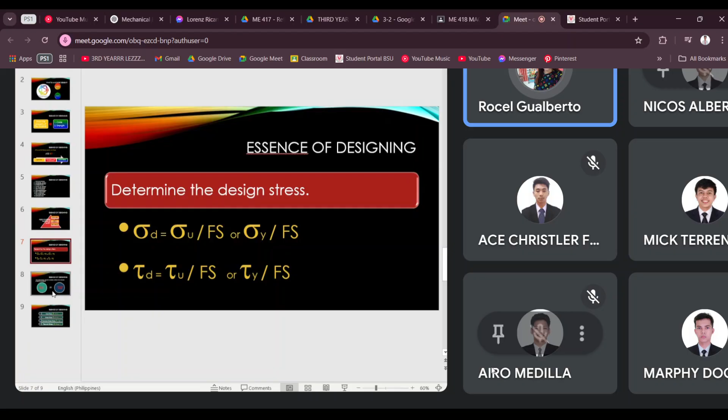Dito, factor of safety. You have there the design stresses and the equation between design stress and the induced stress. Okay na po? Opo. Okay.

So, na-start natin yung, tayo lang, wait. Show ko lang yung isip. Ito po, na-start na po natin ito. Ashley, hindi pa. Okay, so we're done doon lang sa module 1. Okay, sige.

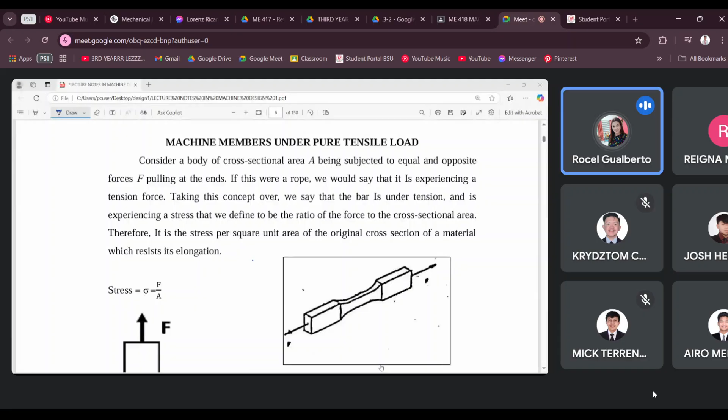Okay, so let us start with members under pure tension. Last time po, we have our essence of design. Okay, so yung mga procedures po doon, okay, yun po yung magiging guide natin in solving for all the problems. Okay, so we always start with knowing the properties of the material as to code and as to strength. Okay, so sa solution po natin, we call that our material specification.

And then followed by the application of a factor of safety taken from your table 1.1. So this factor of safety, it is dependent on the kind of load, the type of material, and then the basis of design. Okay, and then the third one is for you to determine the design stress. So we say the design stress would be the ultimate strength over the factor of safety or the yield strength over the factor of safety.

Okay, so it can be sigma u or sigma y dependent upon the basis of design. And this design stress can be in form of sigma and in form of tau. So pipiliin lang po natin between the two kung alin po yung gagamitin. So paano po natin malalaman kung alin yung gagamitin? It is based on the induced stress.

Okay, so for the fourth one, okay, for a good design, you have to equate the design stress to the induced stress of the material. Okay, so sabi ko nga kanina, the design stress, whether it's sigma or tau, it's dependent on your induced stress.

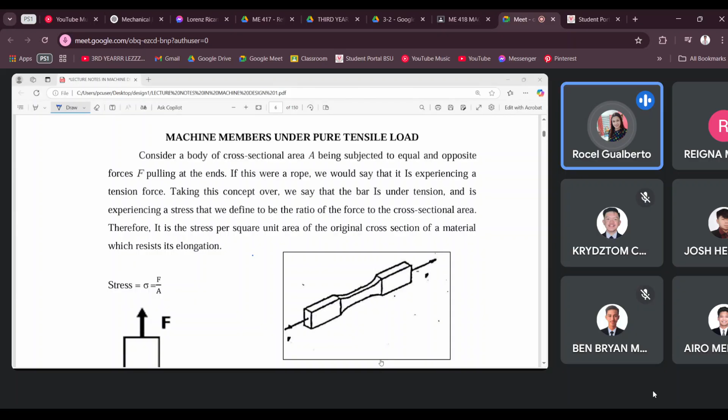So, kung ano po yung form ng ating stress, that would be the same form for your design stress, okay? So, let us have here now yung first topic natin, okay? How do we design the members under pure tensile load, okay? So, a member under tensile load, tulad po nitong nasa illustration natin, okay? So you have here your member and then applied with tensile force F.

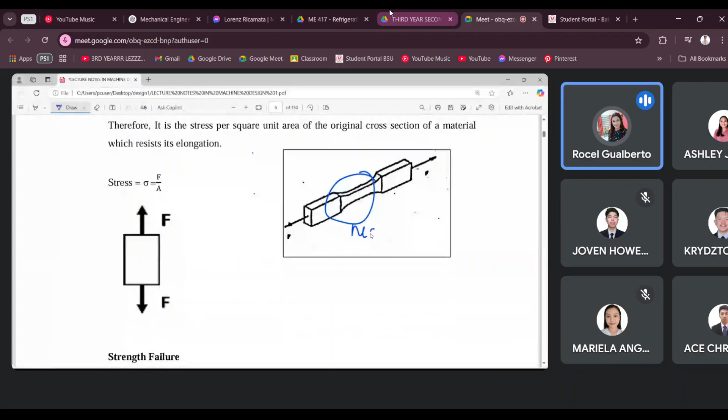So yung force po natin, it tends to pull the material, okay? So what happens now to your material? After a time, mapapansin mo, yung kanyang part na ito, nagkakaroon na ng necking. So we call this po necking. Okay? So necking of force and so as yielding. So when we say yielding po, this is simply elongation. So this is elongation and at the same time necking, that of course when the material is subjected to a tensile load.

Okay? So how do we design a member na ganito po yung force na naka-apply sa kanya? Okay, so we base our design based on the two failures. Okay, so the first one ay base po sa strength failure. Okay, so we say, ang dimension po niya ay base sa induced stress ng material. Okay, so we call the corresponding induced stress simply as the tensile stress.

Okay? And for the equation of the tensile stress, sigma sub T equal to the tensile force over the area. Okay, alin po yung area na yon? It should be the cross-sectional area. So, if, for example, you have there a circular cross-section, okay, then yung area na yun po would be pi d squared divided by 4. So, yung 4 lang, inilagay po natin dun sa numerator. So, you come up with the tensile stress equal to 4F over pi d squared.

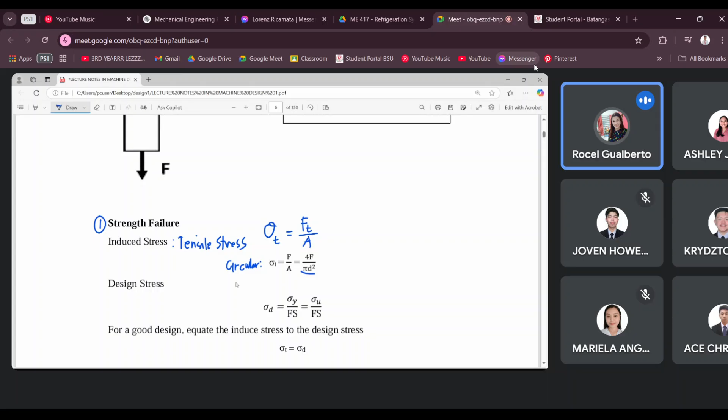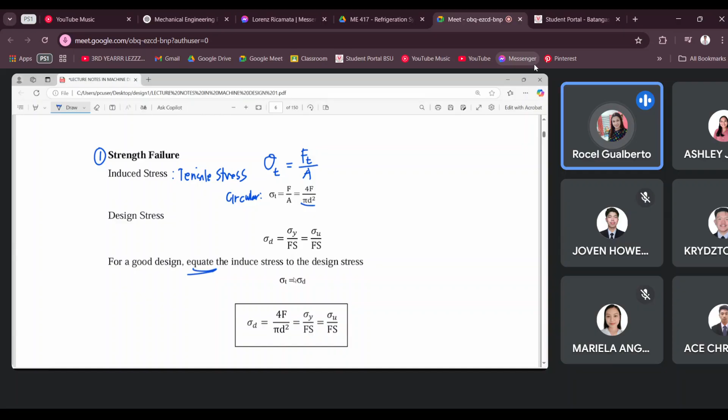And when we say sa design po, okay, we equate, okay, so number 4 po dun sa essence natin, for a good design, you equate the design stress to the induced stress of the material, okay? So, we equate, okay, the induced stress, that is your sigma sub T, to the design stress. You look at the design stress now, okay? The design stress is in form of sigma. Why in form of sigma? It is because the induced stress po ay sigma din, yung tensile stress po natin.

So, we then equate the two, base sa strength failure po natin. For sigma T, that is equal to, kung ito po ay circular, 4F over pi d squared. Okay? At ano naman po yung sigma D? Sigma D can be sigma Y over Fs, o kaya naman po sigma U over Fs. Okay, so yun po yung dalawa.

Kapag basis of design is the yield, ito naman is basis of design is the ultimate. Kaya ano po yung equation natin? So you have your sigma D, kung ilalagay natin, paghiwalayan natin based on ultimate, your sigma D is equal to sigma U over factor of safety.

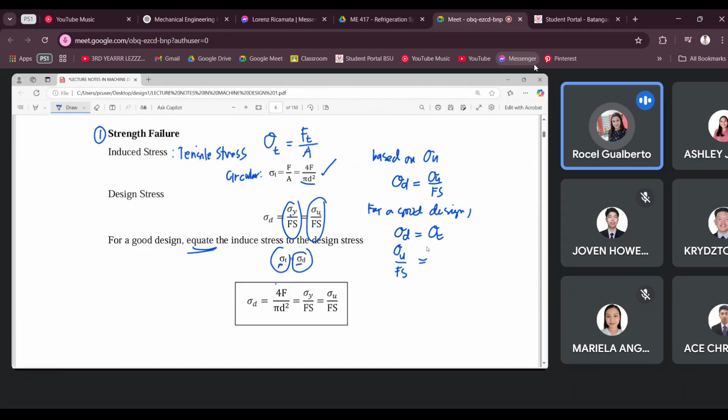For a good design, you equate design stress to the induced stress of the material. So this is sigma U over Fs equal to the tensile stress kung siya ay circular. Ilagay muna natin yung Ft over A. At kung siya ay circular, that is 4F over pi d squared equal to sigma U over Fs. So from this, you can compute now for a diameter or a dimension. Sigma U and Fs, this will be taken from the table.

The force here is usually given, the tensile force. Then you can compute for the diameter. So yan po yung based on the ultimate.

Kung based on yield naman po, then what would be our equation? Your sigma T is equal to sigma D. So this time, sigma D would be sigma Y over Fs equal to 4Ft over pi D squared. So you can have there another diameter.

Yari po naman ay based on your sigma Y. Titingnan mo lang po doon sa problem, ano ba yung requirement ng design. Is the design based on... yun po sinabi, yung basis ng design, ano yung gagamitin natin.

It depends on the material. Kung ang given material sa atin ay ductile, ang gagamitin natin ay based on yield. Kung siya naman ay brittle, ang gagamitin natin is based on ultimate. Yun ay kapag wala lang sinabi. So that is how we decide based on the strength failure.

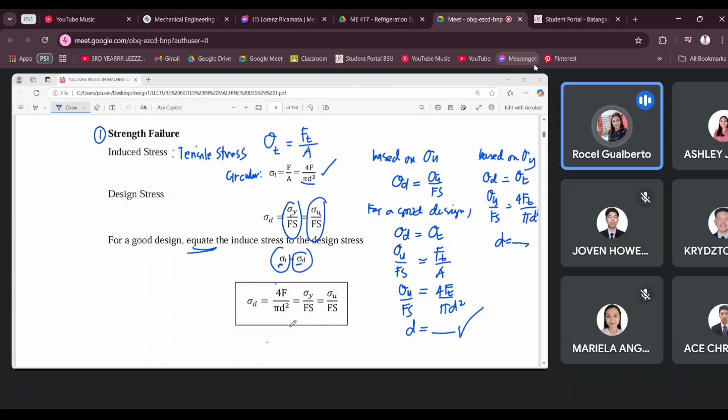Pangalawa naman, ang pangalawa po ay base sa tinatawag natin as the deformation failure. Ano naman po yung deformation failure? When you subject the material to a tensile load, what will happen? Pag hinila natin yan, nagkakaroon ng necking and at the same time, nagkakaroon ng yielding or elongation. So we have there the corresponding deformation.

So the deformation is equal to FL over AE. Yan naman po ay na-derive natin during our deformation lesson. So the deformation is equal to FL over AE. When you say deformation, this is simply the change in length, this is simply delta L. Kung ito po ay tension, so this is your elongation. So the elongation is equal to FL over AE.

If you have again a circular cross-section, yung area natin, papalitan natin. So the deformation now would be equal to the tensile load times length, over area pi d squared over 4, then E. So this is the deformation or the change in length: tensile load, original length of the material, cross-sectional area that bears the diameter or the dimension, and E is the modulus of elasticity. So iyan po yung value.

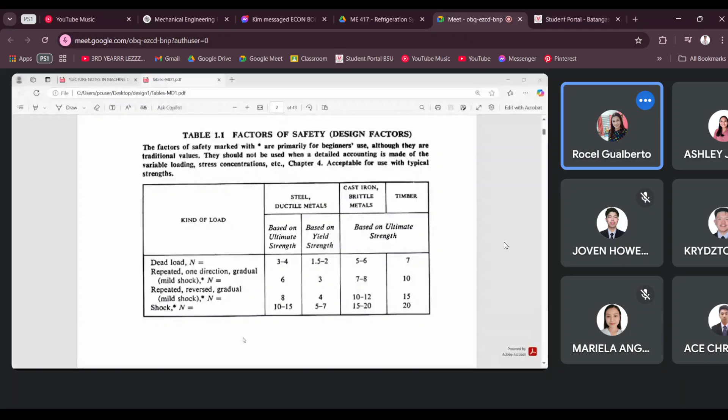AISI C1020 as rolled. And then you find value of E po. Hanapin po natin dito yung E.

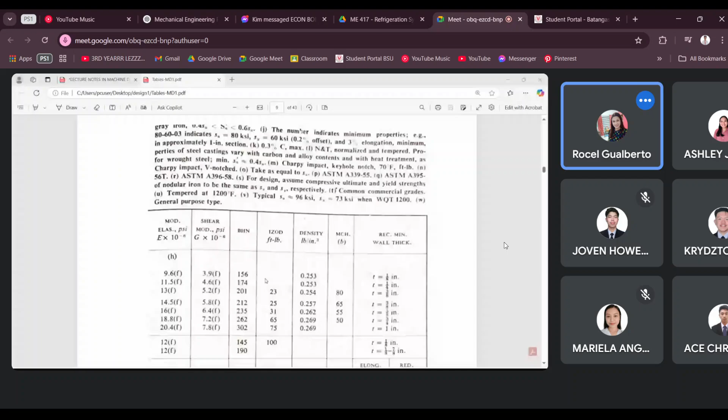So this is table AT 7. Ang hahanapin mo po muna is yung material, say 1020 as rolled. So ito po yung 1020 as rolled. Ang gagawin mo po, titingnan mo within yung row ng 1020 as rolled kung may given value ng E. Pagtingin niyo po dito, wala naman po din yung value ng E. Yung kasunod na page, yan po kadugtong niya, pero wala din po tayo nakitang value ng E.

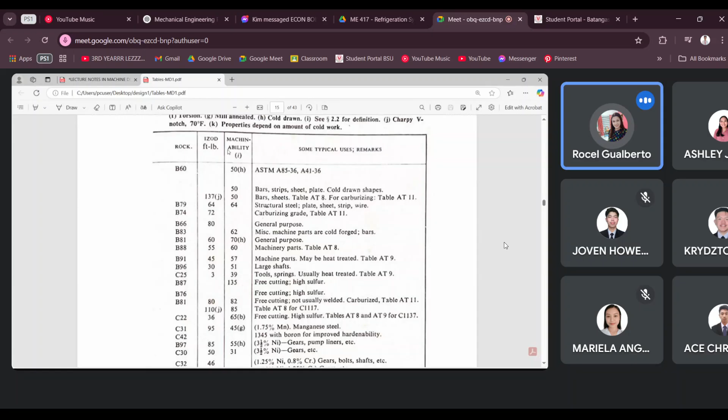So there are cases na wala within the row niya, pero yun po ang una natin titingnan. Dapat doon sa row, tingnan mo kung may value ng E. Pag wala po doon, saan pwedeng tingnan? It would be on the heading ng table, katulad po nito.

Sa heading ng table, makikita mo dyan may nakalagay na modulus of elasticity in tension or compression equal to 30 times 10 to the 6 PSI. Ibig sabihin, yun yung ating gagamitin. At yung E na yan would be valid for all materials listed in this table AT 7. So ganun natin hahanapin yung value ng E, at isasama natin yan doon sa material specification.

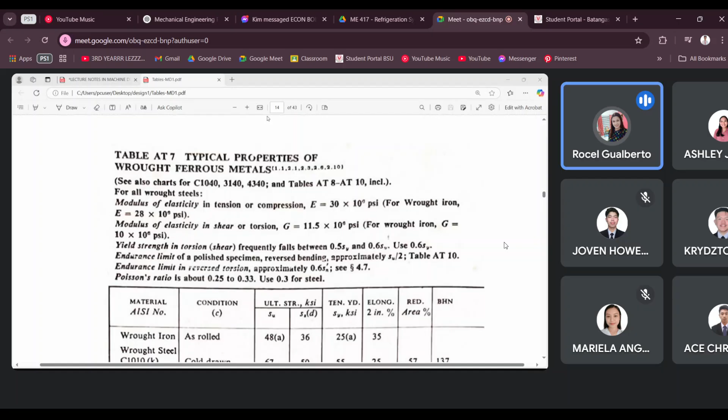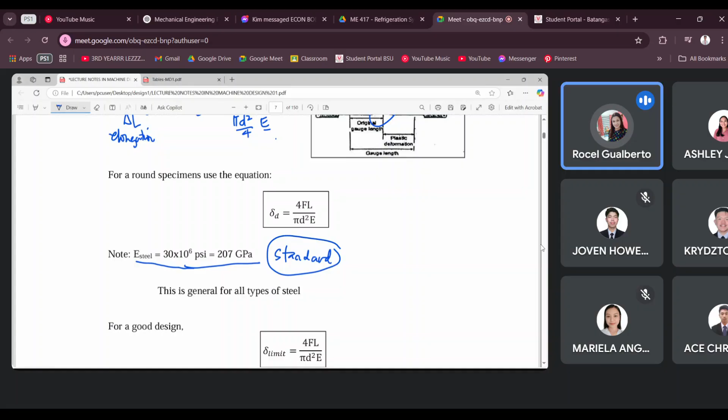Di pag given, doon natin siya isasama along with your sigma U and sigma Y, and then the reference table kung saan siya nakuha. Yun yung ruling sa paghanap ng value ng E. Una, within the row. Pag wala dun sa row, titingnan mo naman doon sa heading ng table. Tapos pag wala pa din, assume to use the standard. This is the standard value for steel, that's 30 times 10 to the 6 PSI or 207 gigapascal. Gagamitin mo itong value. Standard na yan kung wala doon sa table of properties ang value ng E, yun yung isasubstitute natin. But in this case, naka-indicate yun doon sa table AT 7, 30 times 10 to the 6 PSI, which is equal to the standard also.

Now, for the deformation failure, ito naman ang gagawin natin. So we say for a good design, you equate the allowable limit of deformation to the actual deformation, the computed deformation. Yan yung FL over area times E, na kung circular, magiging FL over pi d squared over 4 multiplied by the modulus of elasticity, equal to the allowable limit of deformation.

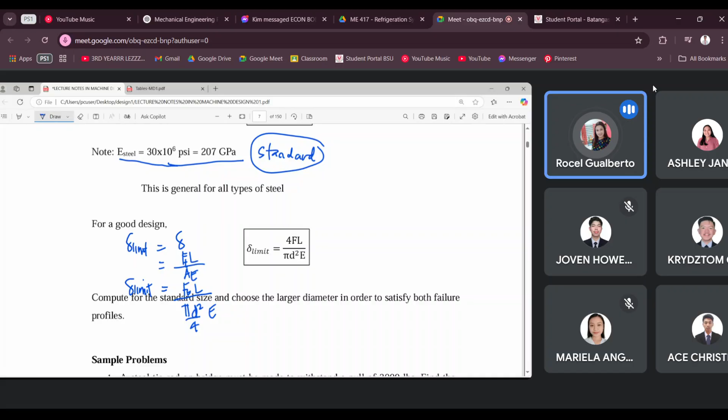Alin yung allowable limit of deformation? Halimbawa, stated dun sa problem, say, the member should not elongate more than 0.1 inch. So yung 0.1 inch, that would be the allowable limit of deformation. Pwede lang siyang magkaroon ng elongation up to this value. Yun yung i-equate natin to the computed deformation, to come up with another diameter or another dimension.

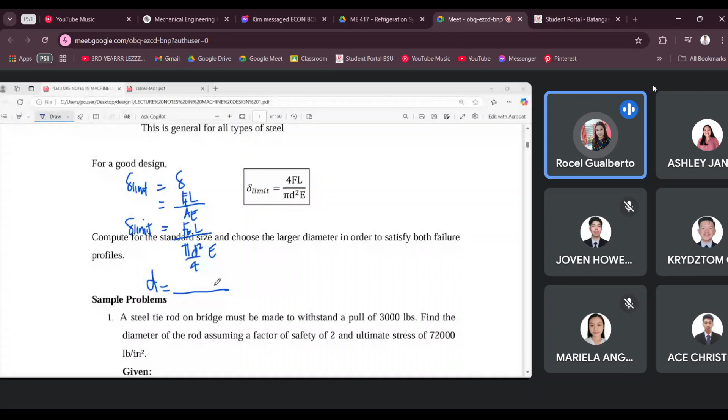So ano pong nandito? Ito ay sagot galing sa deformation failure. Kanina, we have come up with our answer also gamit naman itong strength failure. Ibig sabihin, we have there two answers. So when we design, we do have there two answers, one coming from the strength failure, the other one coming from the deformation failure.

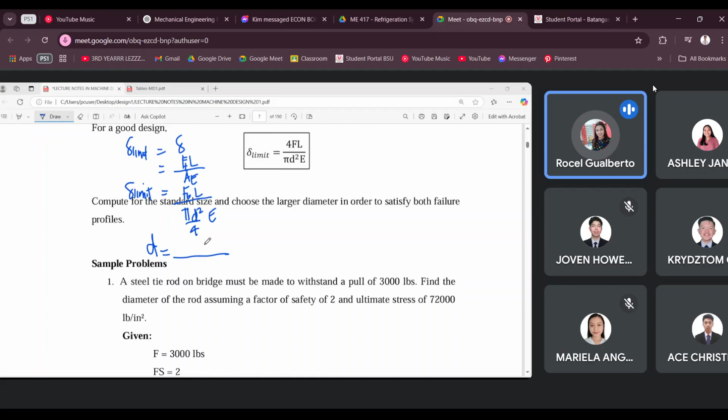Ano po ang gagawin ngayon? Since we have there two answers, alin yung pipiliin? You simply choose the larger diameter. Dapat meron kang conclusion: therefore, use the larger dimension, or bigger dimension, to satisfy both criteria. Alin yung sinasabi kong both criteria? Yung dalawang failure, the strength failure and the deformation failure. So you use the larger diameter, kaya lalagay mo dyan, therefore use kung alin man sa dalawa yung mas malaking value.

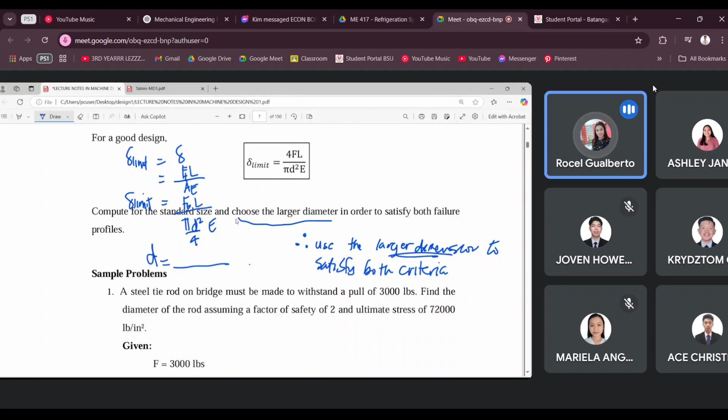Not at all times there would be a deformation failure. Ang deformation failure, meron lang if you are given this. Pero pag wala namang nagbanggit as to the allowable limit of deformation, then the answer would be based only on the strength failure. So isa lang din yung magiging sagot mo, at yun lang yun na din yung magiging conclusion, kasi wala ka naman pagpipili. Yun. So yun yung way on how we solve for a member under pure tension.

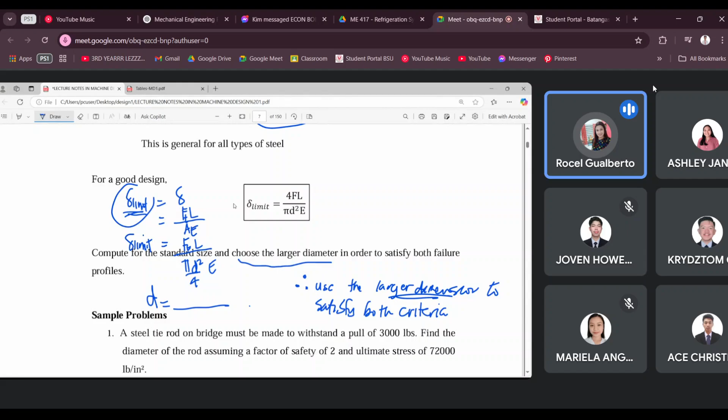Okay, let us take the case of the sample problem. Init po tayo. Yan, so for number 2.

For number 2, this is a link which is subjected to a tensile load of 10,000 pounds. This is made of AISI C1020 steel, normalized. If load is repeated but not reversed, and H is equal to 20... this is H is equal to 2B, sorry. Determine the dimensions of the section with the design based on the ultimate strength. So ito yung ating B, ito yung H. The cross-section of the link is a rectangular cross-section.

So when we solve this, ang gawin ninyo, you try to resolve on your own. Do not simply rely on the solution presented dito sa lecture note, para matutunan ninyo rin kung paano natin siya gagawin. Ang gawin natin, gawin natin ito: instead of the ultimate strength, we make it now the yield strength, para maiba yung ating solution.

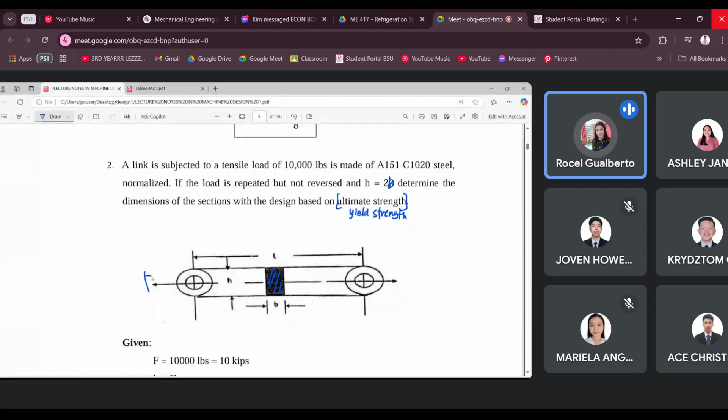Okay, so you look at this one. A link is subjected to this tensile load. This is your FT, which is equivalent to 10,000. This is the link made up of 1020 steel normalized. The load is repeated but not reversed. And then you have the cross section H and B. So you are to determine what is the value of H and what is the value of B, with the design based on yield strength. So whenever you solve, you follow the essence of this.

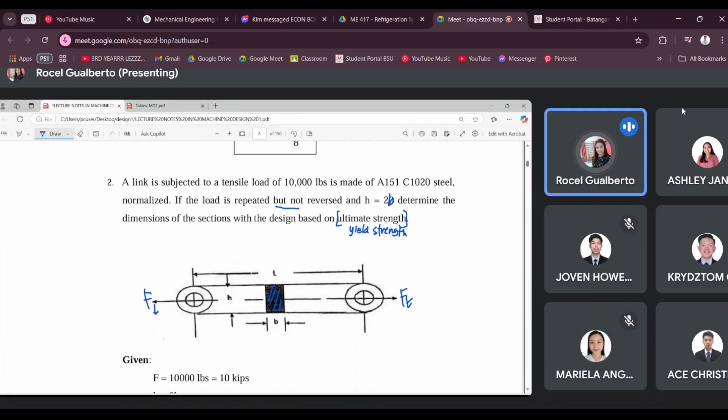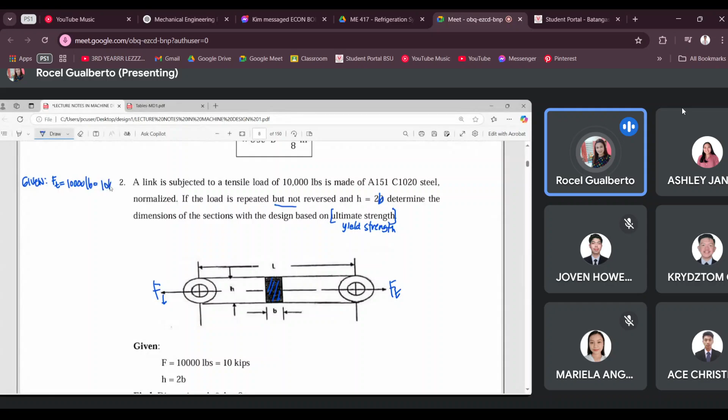Here's the given values. So we start with the given, you identify the given values. First, you have the tensile load, that is 10,000 pounds, equivalent to 10 kips. And then another given is the relationship between the dimensions: height is equal to twice the width, H is equal to 2B. And then after this, you have their material specification.

So for material specs, know the property of the material as to the code and as to the strength. So you put the code of material plus the sigma U and the sigma Y value. Now, you also add the value of E, the modulus of elasticity, if there is one in our problem or table. So we have AISI C1020 normalized, that is our material, that is the code. Then find value of sigma U, find value of sigma Y, and if there is a value of E, indicate it as well. Please find it in the table of properties and what would be the value of your sigma U and sigma Y. Same thing with E. Please put it in the chat box. Go ahead, find it now.

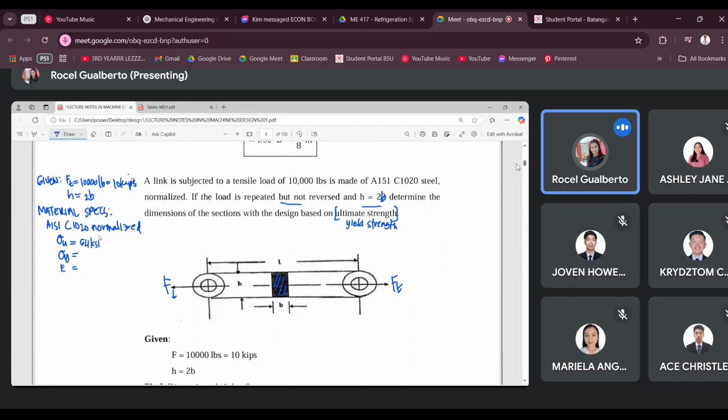You have their table AT 7, page 15. So find our value. Okay, to make it easier, 1020 normalized, there it is. So sigma U is 64, and the value of sigma Y, so this is 64 and the other one is 50. So this is 64 KSI, and then this is 50 KSI. And then for the value of E, it is not within the row, you have to look again at the heading of the table. So 30 times 10 to the 6 PSI. So E is equal to 30 times 10 to the 6. We can have this written as 10 to the third, but then it would be in KSI. So this is taken from table AT 7, page 15.

So after this is to apply a suitable factor of safety. Thank you, Glorious and Christian. So we have here now, after our material specification, we go now with the factor of safety. So we follow the procedure defined in the essence of design. So we have here factor of safety as the next step.

Now, for the factor of safety, it is dependent on several factors, three in fact. The first one: the kind of load. From the problem, it is stated that the kind of load is repeated but not reversed. So this is the kind of load. After that, what's next? The type of material. Given is 1020 steel normalized. So what is the type of material?

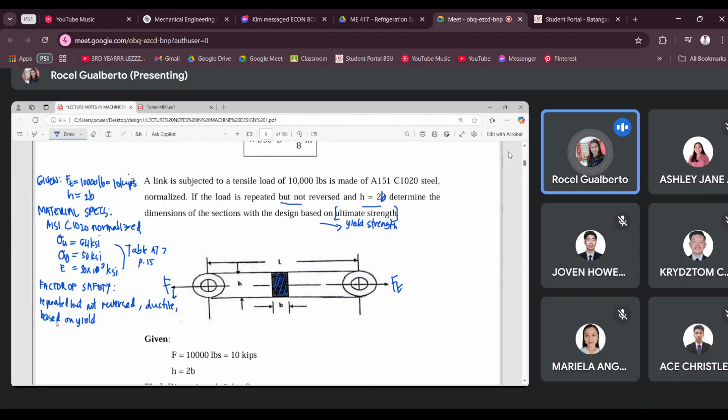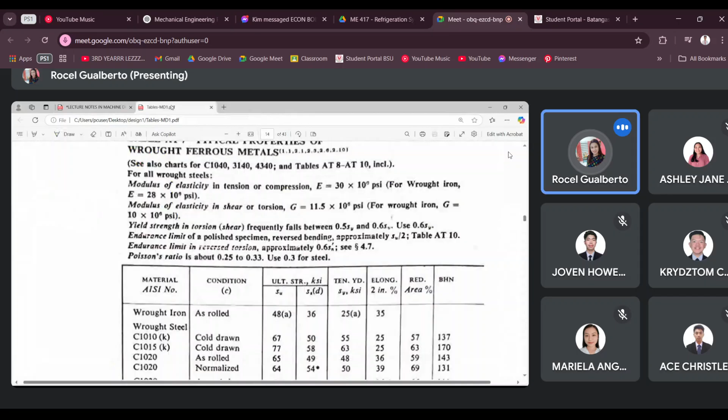So repeated but not reversed, ductile, and then the other factor would be the basis of design. So what is then the basis of design? I corrected this already. So what we do is put that it is based on the yield. So based on the yield. In our example solution here, that would be based on the ultimate. So given these conditions - repeated but not reversed, ductile, and based on yield - we use table 1.1 to determine the factor of safety, that is on page 1.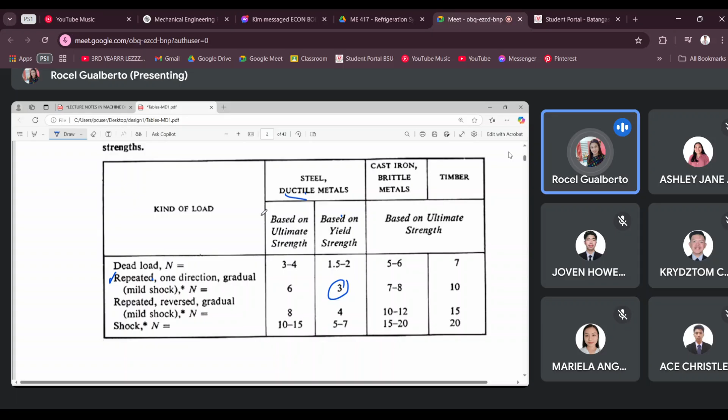So kind of load: repeated but not reverse. That means it is repeated in one direction only. Because if it says repeated but not reversed, so it's repeated in one direction. And then you have a ductile material, and then based on the yield strength, so that's my requirement: based on the yield strength. So repeated in one direction, ductile, and then based on yield, so that would be 3 as our factor of safety. So Fs is equal to 3, taken from table 1.4, page 1. So this is the factor of safety.

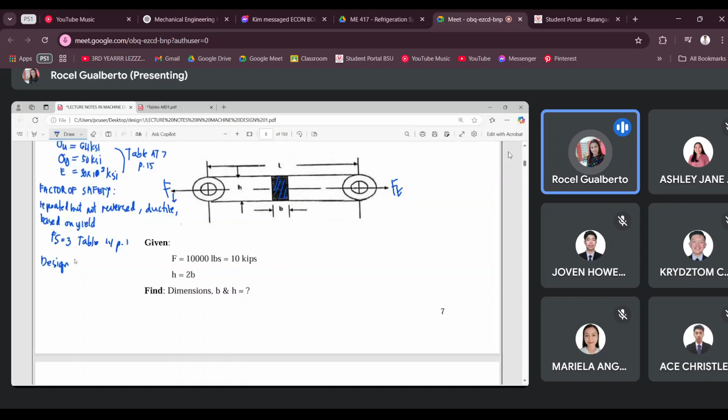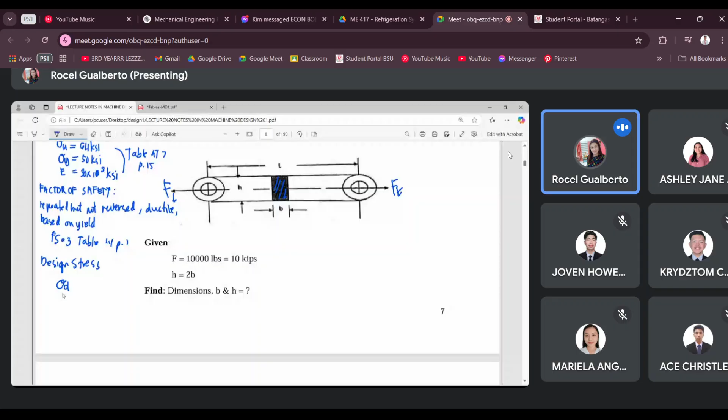After applying a suitable factor of safety, you come up now with your design stress. For the design stress, we use sigma D. Why do we use sigma here? Because the induced stress is tensile stress, also in the form of sigma.

Since what we have now is based on the yield strength, then the design stress should be based on the yield strength. So that would be equal to sigma y over factor of safety. Then you simply substitute: sigma y is 50 KSI, and the factor of safety is equal to 3. Then what would be the value of the design stress?

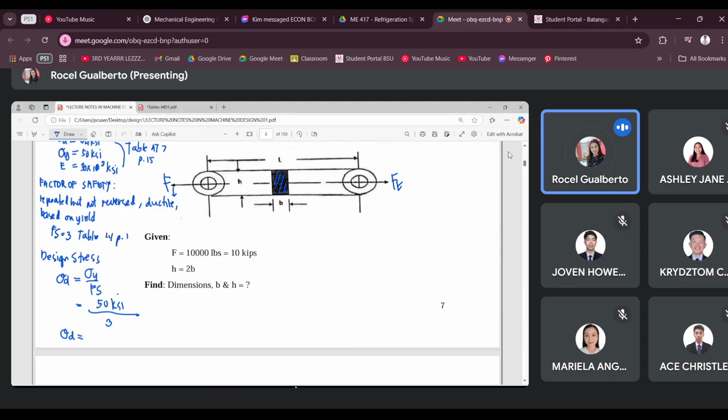What is the value of our design stress? Recompute: that's just 50 divided by 3, so we have 16.667 KSI for the design stress.

So what comes next after the design stress? After the design stress, that's where our two ways of solving for the dimension come in. It's by the strength failure, designing against the strength failure, and the other one is considering your deformation failure.

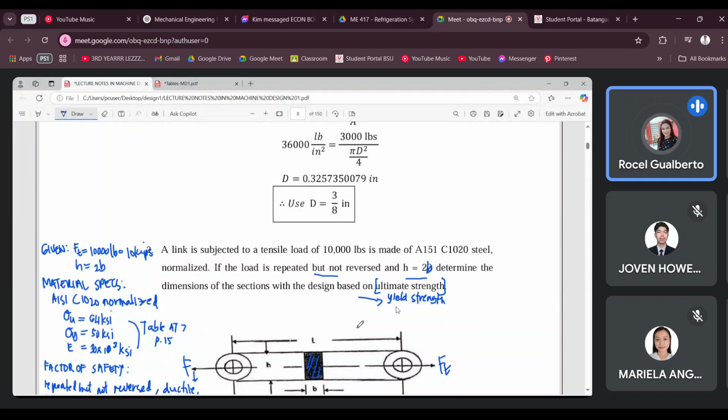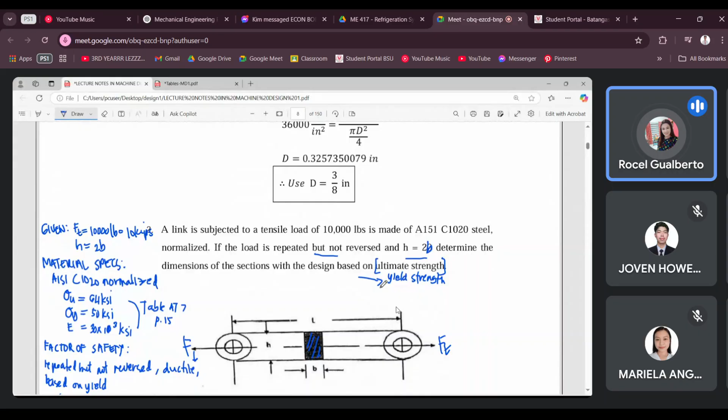But looking at the sample problem, given this problem, we are not given the allowable limit of deformation. So since the allowable limit of deformation was not given, our design will be based only on the strength failure. But if it were given, then there would be two answers.

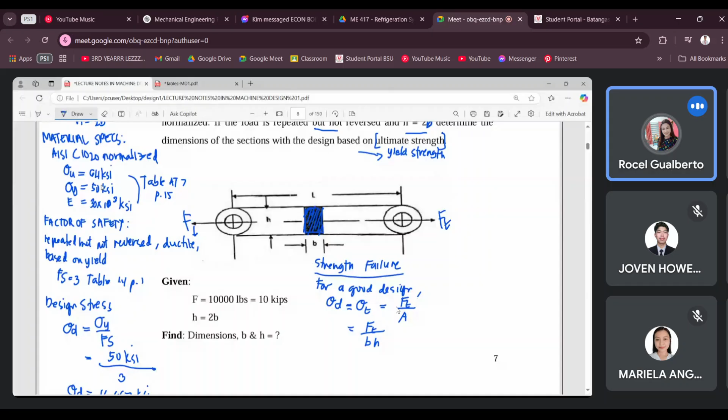But there is a relationship given such that H is equal to 2B. So what we do is express H as 2B. So FT over B times 2B, we get FT over 2B squared.

Substituting the value, FT is equal to 10 kips, over 2B squared. And what is our value of sigma D, the design stress we solved for? That's 16.667 KSI.

Use your calculator to compute for the value of B. So we have 0.548, so that's fine. So B is equal to 0.548 inches. But as I have said, our answer cannot just be that.

We have to express our answer to the commercially available size. What is the commercially available size for that B value? Let me show you. Our answer cannot just be that computed value, we need to convert that to the commercially available size.

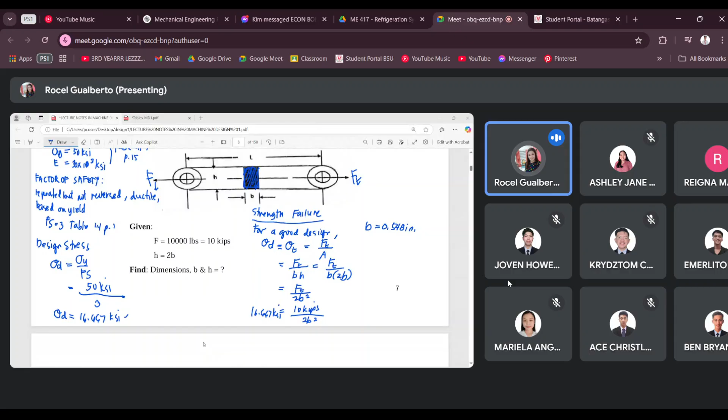This is how we incorporate the economic aspect of our design, by expressing it to the standard size. So these are the preferred sizes, and these are what we use to come up with a standard size.

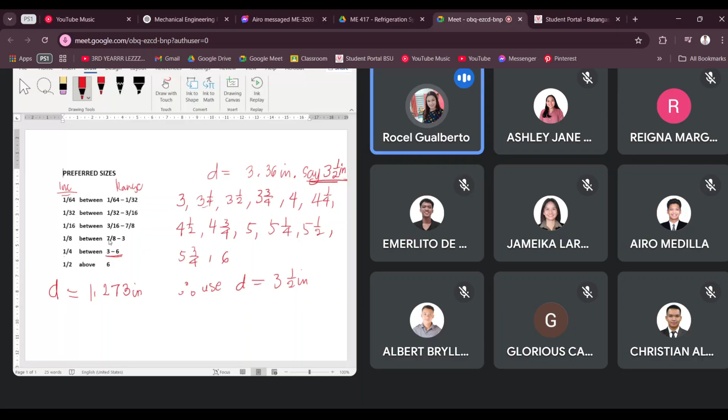Okay, halimbawa po, isa pa po. Say, diameter nakuha natin is 1.273 inches. So saan naman po siya papasok? Okay, so saan po siyang range? Nandito po siya sa 7/8 up to 3.

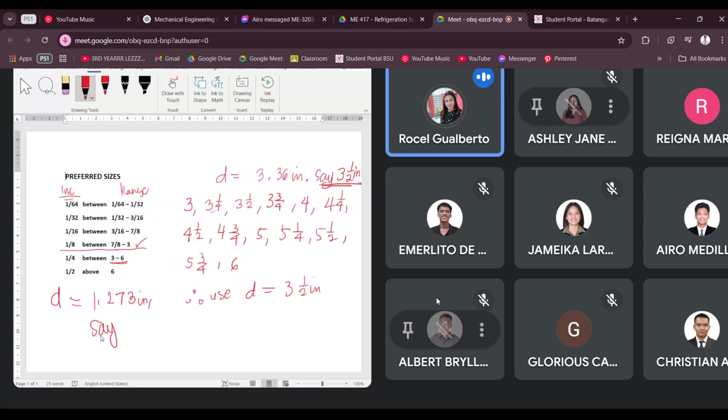Mga available sizes on this range? So we start with 7/8, tapos 8/8 na po ang sunod, ang 8/8 is equivalent to 1. Tapos 1 and 1/8, 1 and 2/8, and 2/8 that is equivalent to 1/4. Okay, tapos 1 and 3/8, 1 and 4/8 or 1 and 1/2, tapos hanggang marating mo po yung 3.

Okay, but then ano pong given? 1.273, nandito lang po yun. Okay, 1 and 1/2, 1 and 5/8, 1 and 6/8 or 1 and 3/4, tapos 1 and 7/8, tapos 2, and so on.

So ano po ang equivalent na? Alin po dyan? O, alin po dyan yung standard size niya? Okay, tama po. That would be 1 and 3/8 of an inch. Okay, so that would be our answer. Okay, ay, balik, balik, balik, balik, balik. Okay, so we have there, say, 1 and 3/8 of an inch, so that is our answer.

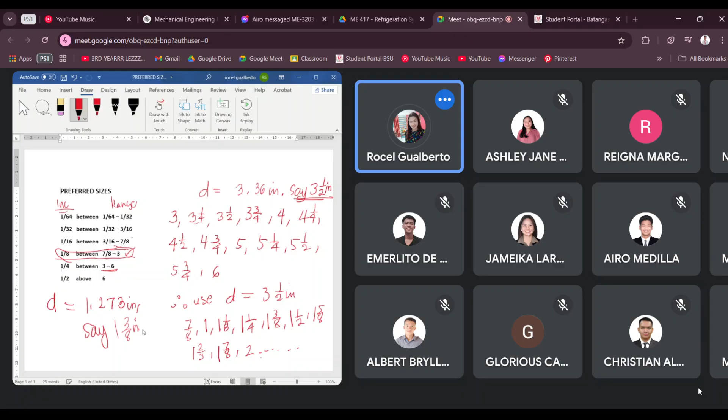Okay, yan. So ang gagawin po natin ngayon, dun sa answer nyo po kanina, okay, ibabalik po natin, then you try to take a screenshot muna po na rin yung preferred sizes. Paki-screenshot nyo muna po, para po ma-convert nyo po yung kanina, yung naging answer po natin, doon sa problem on the value. So, ari po, again, this is the increment, at ari po yung range po.

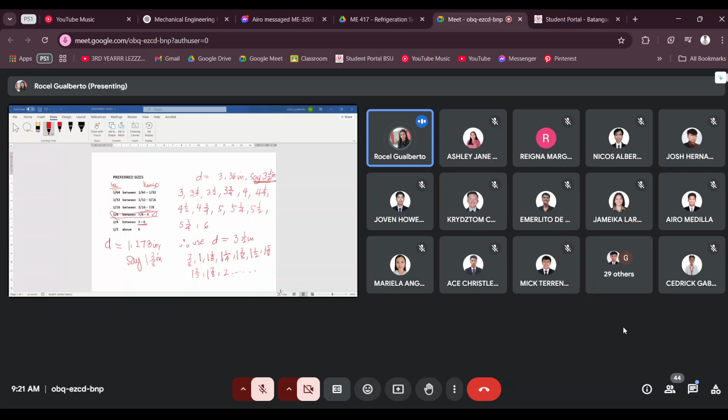Na-screenshot nyo na po, hindi po? Nawala po, ma'am. Ari po, ito pong... tell me po if it's okay na, tapos ilipat po natin doon sa solution po natin kanina. Okay na po? Yes, okay.

Okay, so you try naman po to convert po yung answer po natin, 0.548 inch, into the standard size. So what would be its equivalent?

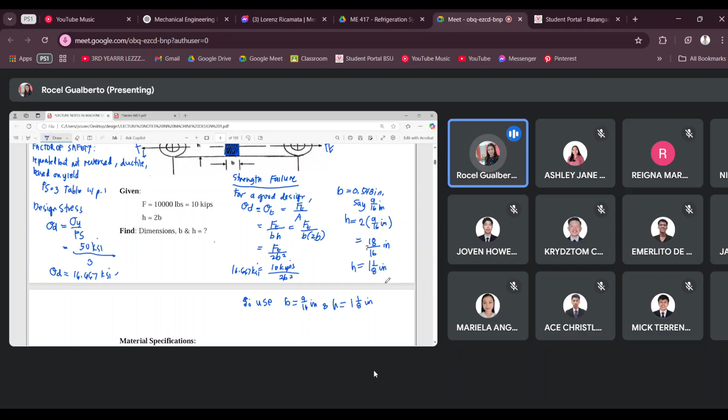So for example, on this design work 1, which is almost the same as what we solved. This one has an allowable limit, not to elongate more than 0.005 of an inch. So let's solve based on the yield or based on the ultimate, whichever of the two. Let's try to solve this problem 1.

Please work on the given material specification first, and then you have your factor of safety up to the design stress.

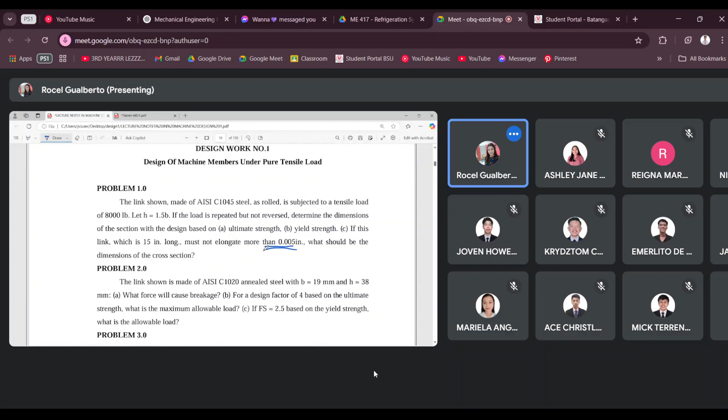So we have problem one. A link shown made of 1045 steel, as rolled, is subjected to a tensile load of 8,000 pounds. Let H equal 1.5 of B. If the load is repeated but not reversed, determine the dimensions of the section with the design based on the ultimate strength and the yield strength. If this link, which is 15 inches long, must not elongate more than 0.005 of an inch, what should be the dimensions of the cross section?

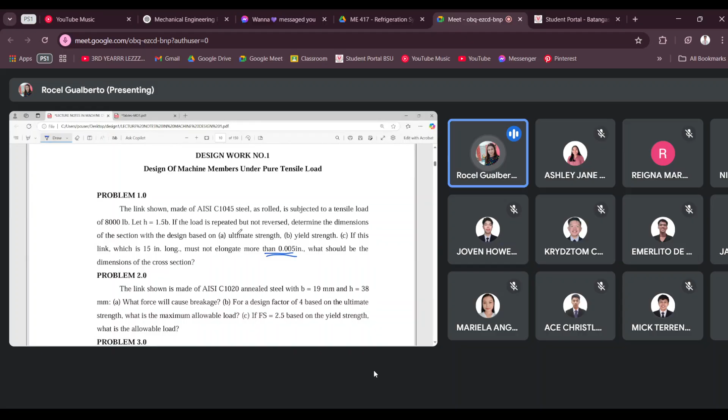So what we'll do is letter C. Let's consider its elongation, the allowable limit. So we start with the given values.

We have the tensile load equal to 8,000 pounds, or equivalent to 8 kips. We have H equal to 1.5 of B, and the allowable limit of deformation equal to 0.005 of an inch. Also, you are given the length 15 inches. And then next would be as follows.

So please find what is the value of sigma u, what is the value of sigma y, and if you have there E, the modulus of elasticity.

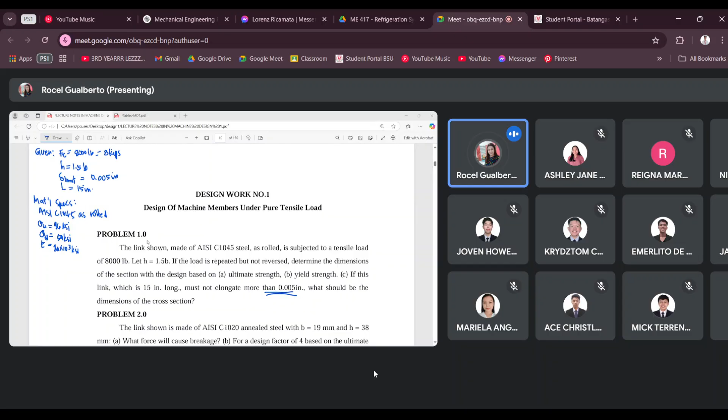Taken from what table? Where did this come from? Table AT 7, page 15. So, taken from table AT 7, page 15.

So after the material specification would be our factor of safety. So what are the conditions?

The load is repeated but not reversed, and the type of material is C1045, therefore this is ductile. And the second one is design based on the ultimate. So what is letter A? Repeated but not reversed, ductile, and based on ultimate.

So what would be the value of the factor of safety? Look at the condition again: repeated but not reversed, so therefore repeated in one direction, ductile material.

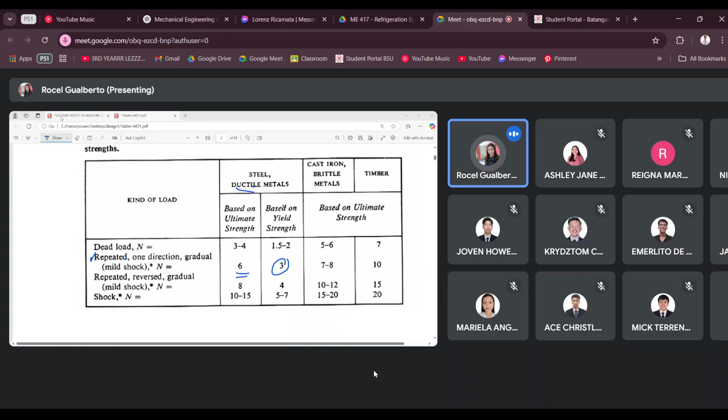So our factor of safety depends on three conditions: repeated but not reversed, so that is repeated in one direction; it's a ductile material; and it's based on ultimate. So therefore we arrive at a value of 6 for our factor of safety. So for this letter A, your Fs is equal to 6, coming from table 1.1, page 1. So that's our factor of safety.

Now if you do letter B instead, you would have a different factor of safety based on the yield, and in this case it will be equal to 3. So what's next? We're only solving based on ultimate here so far.

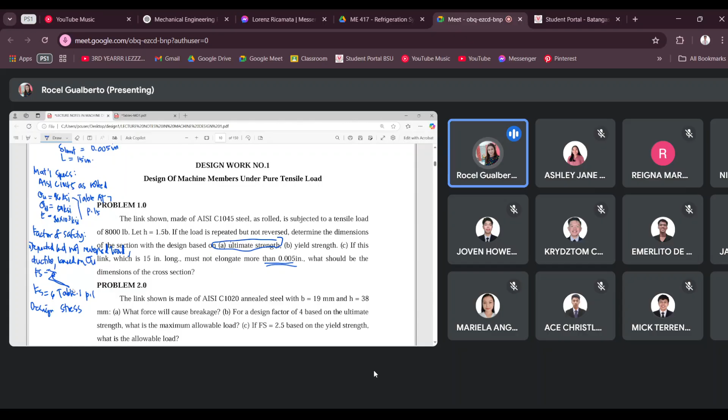After the factor of safety, you come up with the design stress. So what would be the value of the design stress? Your sigma D is equal to sigma Y or sigma U over the factor of safety. So the sigma U we got, that's 96 KSI, divided by 6, the factor of safety based on the ultimate strength. So what would be the value of sigma D? What is 96 over 6?

Okay, so we have there 16 KSI. If the connection is lost, please inform me. So this is getting cut off. Okay, so the value is 16. So sigma D is equal to 16 KSI.

Okay, and after the design stress, that's where we go into our procedure. Since here we're given an allowable limit of deformation, we will have two answers. One coming from the strength failure, and the other one will come from the deformation failure. So coming from the strength failure, consider first the strength failure.

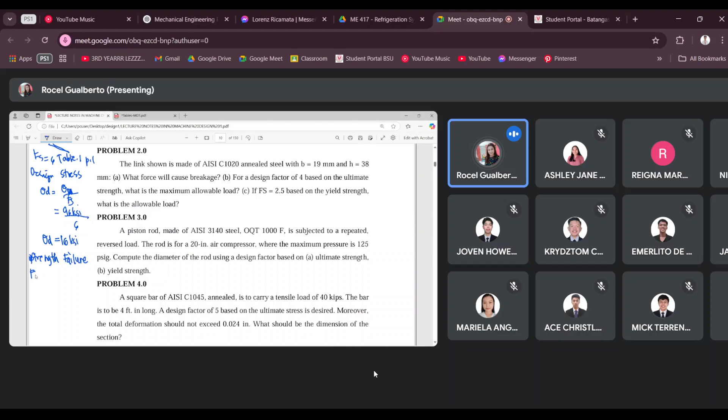So for strength failure, we say for a good design, equate the design stress to the induced stress of the material. So sigma D equal to the tensile stress. So the tensile stress, this is equal to FT over the area.

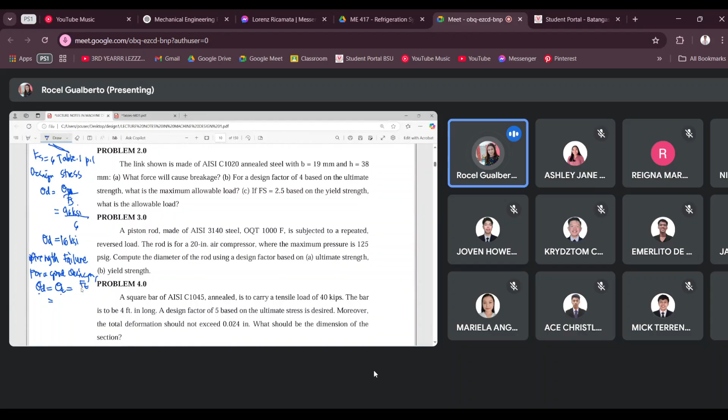So what is our area? Rectangular again with B and H relation. So this is FT over B times H. And B and H have a relationship, so we express one in terms of the other. H is equal to 1.5 of B. So B times 1.5 of B.

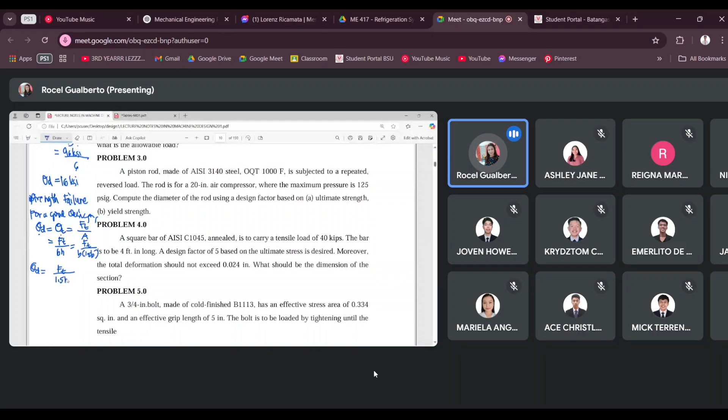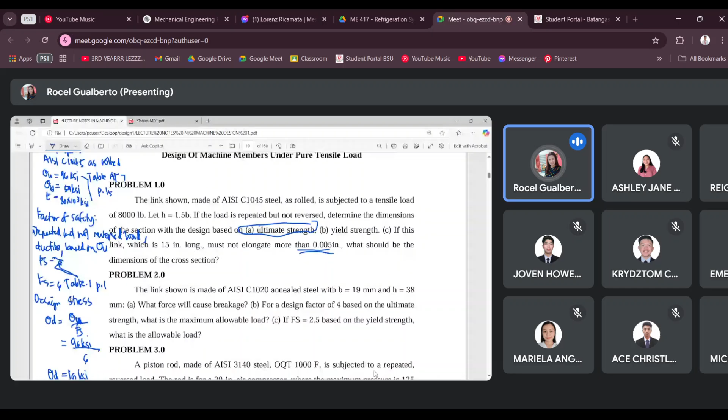And so the design stress therefore would be equal to FT over 1.5 B squared. Eight kips, okay, 8,000 pounds or 8 kips over 1.5, okay, B squared.

And then from there you can solve now for B. Let me solve this. Okay, so 0.577 inch. Okay, that's it. 0.577 inches. Okay, and then you look for the standard size for this.

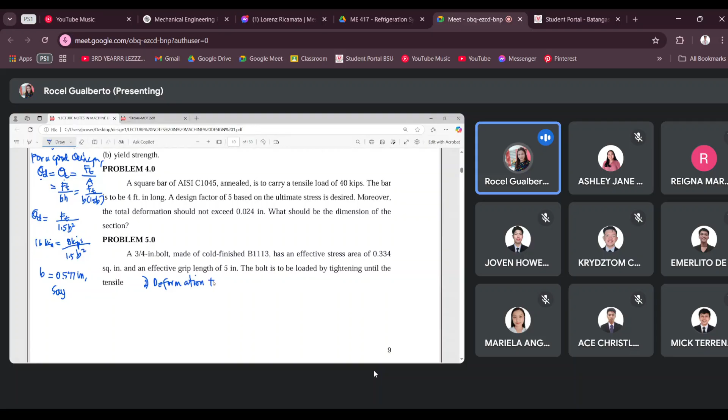So what do we equate here? It is the allowable limit of deformation to the computed deformation. Okay, so the computed deformation is simply FL over area times E.

And we have FT, the length, the area. What is the value of the area? It is equal to 1.5 by B squared. Incorporated here are H and B. That is simply H times B.

And since H is equal to 1.5 of B, it becomes 1.5 B squared multiplied by the value of E, equal to the allowable limit of deformation. Okay, and then next is you substitute the values of FT, of L, this allowable limit, and the value of E to come up with another dimension for B.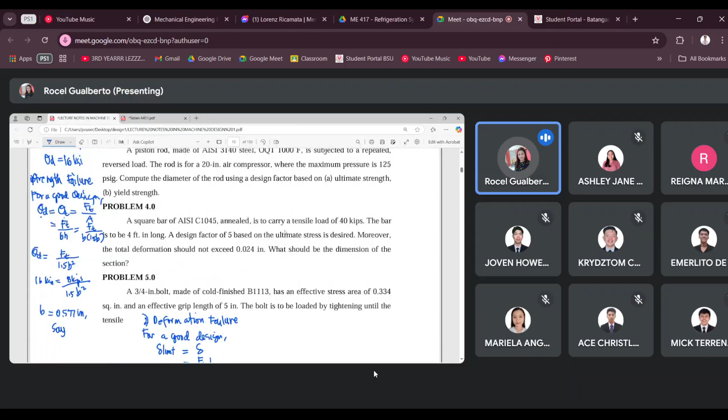Let's substitute. Okay, so what would be the value? The allowable limit of deformation, let me go back, is equal to 0.005. Okay, that's it. 0.005 of an inch. So we have 0.005 of an inch equal to FT, that is 8 kips.

We have their length is 15 inches divided by 1.5 B squared. And E is 30 times 10 to the third KSI.

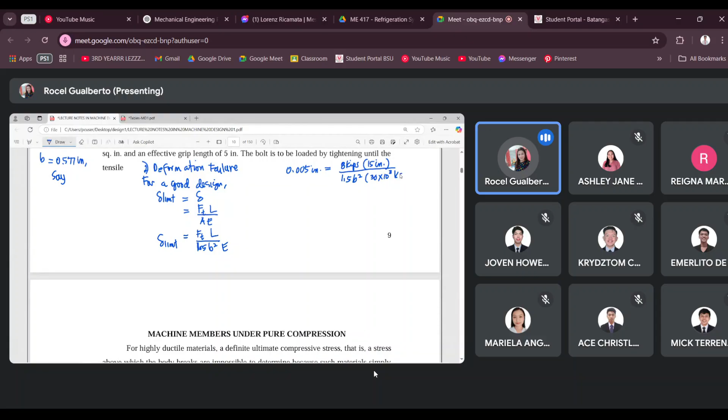Now, the head, so there, there's another one. Okay, what's the standard for this one, and then you solve for another B from the deformation failure.

Okay, for the deformation failure, okay, B is equal to 0.73. Okay, so that's correct. So let me convert now our two answers into the standard size.